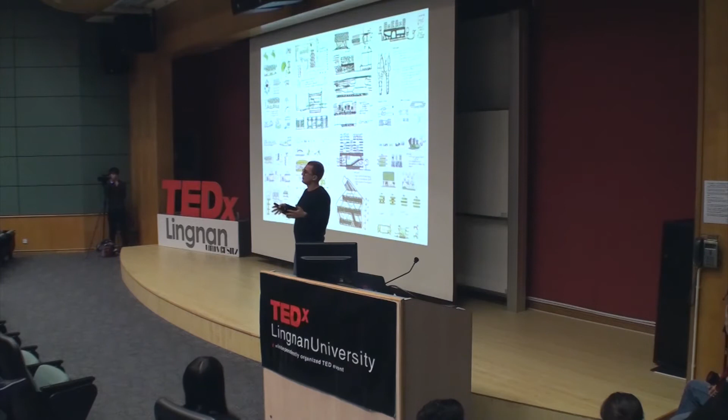What we've realized is that cities, and even new cities — master plans for entire new cities — are really 20th century master plans. The planners are imagining 20th century buildings, the buildings we see all around us today: the apartment tower, the retail podium with an office block on top, the factory building.

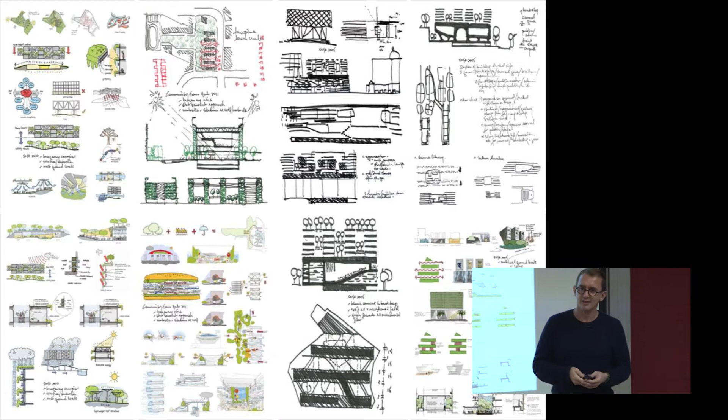If planners are working with these components, and these components were really perfected in the 20th century, no matter how interesting the city plan is going to be, it's being built out of out-of-date components.

So the first thing we thought is, if we're up against limits — limits of space, limits of resources — we can't keep spreading because we have this limited footprint on the Earth. We need buildings and city plans to be in a sort of both-and situation.

In modernism, in the 20th century, you say, oh, this is residential. We think in the future things might have to be many things at once.

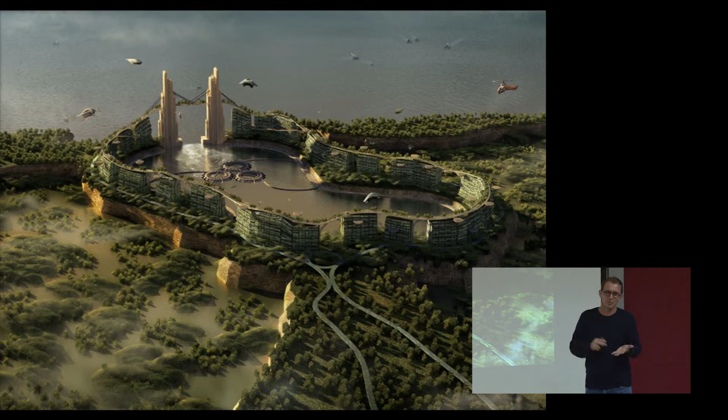This is a speculative scheme we did for Singapore, imagining global warming, where we had to protect against quite a high sea level rise. Singapore currently imports almost all its food and energy; this scheme imagines shrinking Singapore's food, water and energy footprint to the size of the island.

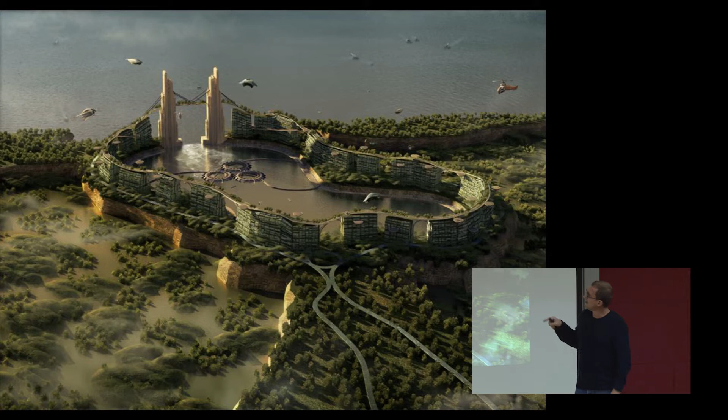So basically the whole coastline has been turned into a giant reservoir barrage wall to keep the rising sea levels out, and this development is a tidal power plant.

Singapore doesn't have very good access to sustainable forms of energy, but it does have quite high tides that go up and down. The idea is the water rushes in and out of this artificial inlet, with a turbine at the narrow mouth where the water goes in and out — but it's also an apartment complex, it's also a recreational area.

It would also incorporate all kinds of multi-use things. So it's power generation, it's flood protection, and it incorporates all the functions of a city.

The next idea is that we need high density to not grow beyond the city's limits and to allow growth within our limits. But we have to have high density, high amenity.

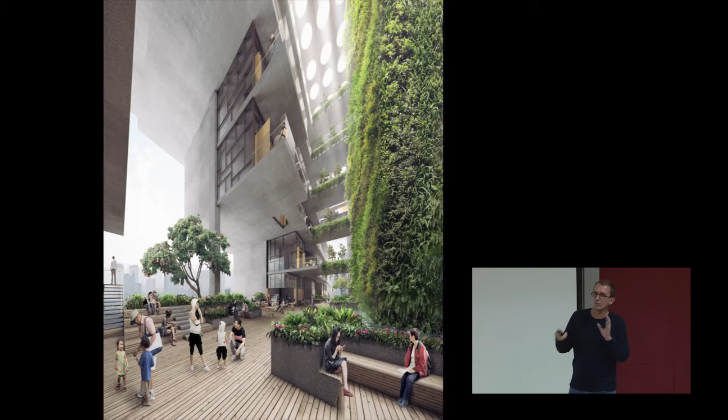So this is a scheme in China for a high-rise office block. The idea is that within the block itself, you have these kind of high amenity areas. You're not relying on the city outside to provide this amenity.

And this idea of density is that if we only keep building functional areas, we keep building offices and we keep building residences, but we don't build parks, we don't build recreation areas, inevitably our quality of life will decline.

But if, as we're going into this high density mode, we think about adding amenity at the same rate or even a greater rate than we have currently, you can actually anticipate a situation where our cities are both denser but have actually more amenities than they do now.

And so this idea too that we have to really actively move towards three-dimensional urban planning. Currently most planning is done two-dimensionally. There's some minor aspects where things have entered the third dimension, but we think in order to achieve this high density, high amenity situation, city plans are going to have to start setting all kinds of planning ideas that go quite high into the third dimension.

This is a scheme I'll show a little bit more later, where we propose a Singapore that's 9 times as dense as Singapore is now. But basically, to do a kind of city like this that was hyperdense, you would have to set street levels way up in the air that every new development had to connect into.

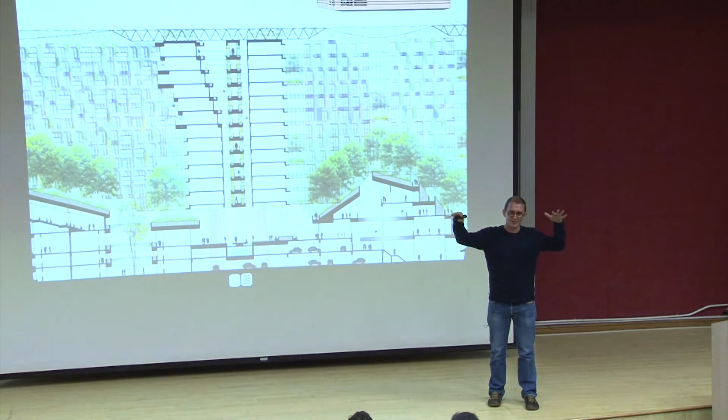This is a proposal we've made for a new city in Java. And so here we were thinking about actually a rainforest. If we're going to make maximum use of our energy, something that's really inspiring to look at is a rainforest where the trees have grown up to maximize the sunlight at the top, and then you have all kinds of subsequent uses as you come down that have less use for energy.

So here we have a solar canopy that covers the whole city. Beneath that you have a layer of agricultural for growing vegetables because they need diffuse light rather than direct light. We have apartments and other offices coming down.

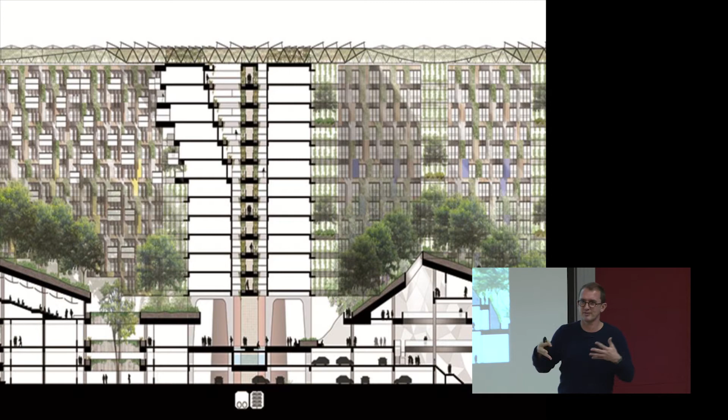Then you have a really interesting ground plane, which in this case we're actually running a tropical forest all the way through the city. So we're not displacing the forest, we're kind of interweaving in 3 dimensions a forest with the city. And that's the kind of environment within the city - it's a fantasy, but like tropical tapirs, endangered species, hornbills flying through the city and coexisting together with people.

So a primary idea behind this high density, high amenity is the need to have multiple ground levels. So this is a school we did in Singapore. It's actually got 3 major levels through the development.

And then on the roof we actually have a 400-meter running track and a playing field. So by consciously thinking of this idea of multiple ground levels, although it's such a high density school in the middle of the city, it actually has really large areas for the kids to play.

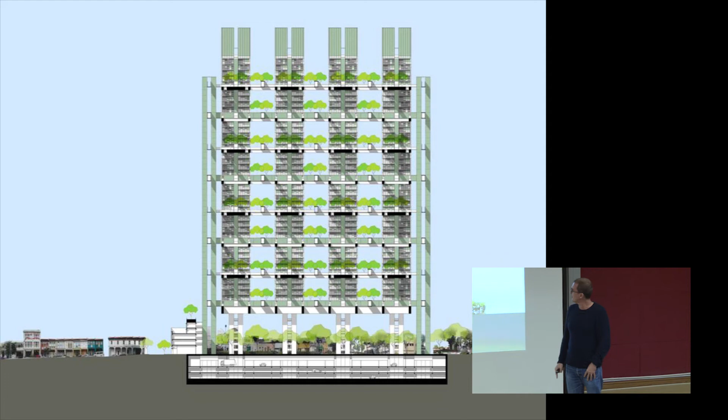Through this, we've been playing with ideas of sky gardens, sky streets, sky villages. So this was a project from 2000, a competition we didn't win, but it was a very high density development and has streets every 5 floors through the development leading to the apartments around.

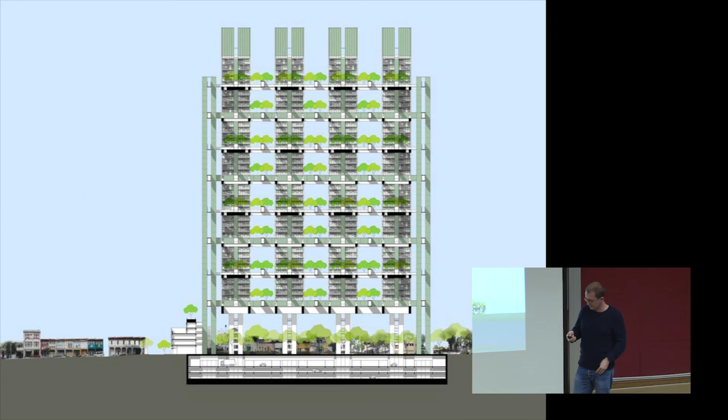This is a public housing project in Singapore. This was a large development, 960 apartments, and we felt that once you get into these large figures, you need to do something to deal with the scale.

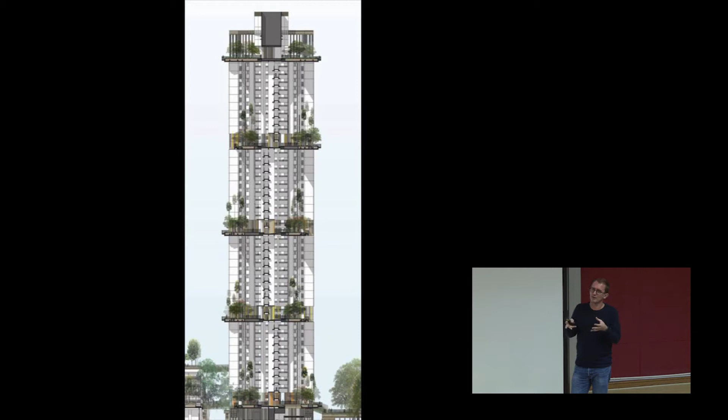So we developed 12 villages of 80 apartments each. Each apartment is identified with this village and shares a common space. Each village has a sort of village square and village garden.

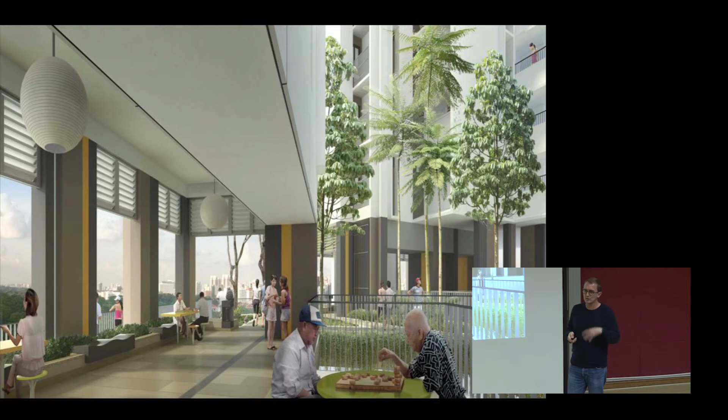All these dwellers can come and get to know each other, they can hold events there, they can walk their dog. And the idea is, as you come from your lift to your apartment, you pass through this space and you look down into it.

Hopefully the outcome is that as people pass through this space every day, it functions very much like a street in a village, and people will start to get to know their neighbours and say hello, rather than the typical high-rise situation where you just don't know any of your neighbours, even though you're all living very close together.

And then, rather than having penthouses on the top that are given to the wealthiest people because it's public housing, we thought it's really nice if there's a big public park on the top. So here, there's a 300-metre route through the top of the building, and everyone can enjoy the fantastic views.

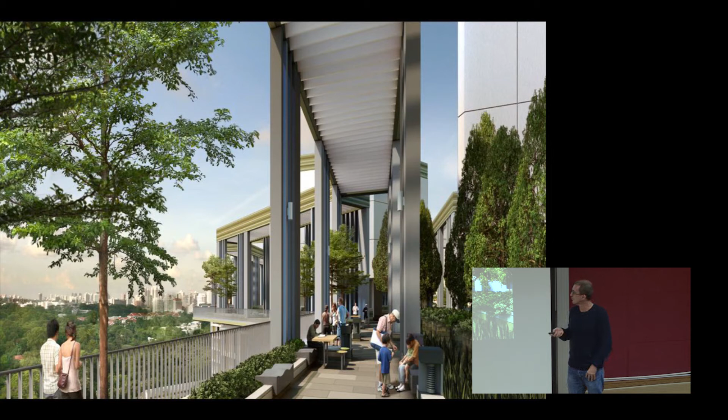Next one we thought is topographic architecture. So we realized as it gets more and more dense, people get a very hemmed-in feeling, because somehow high density buildings are very overwhelming and overpowering. But we realized people really love high density landscapes. Hong Kong is a great example — you've got mountains hanging over you everywhere, but they provoke a very different response than buildings do.

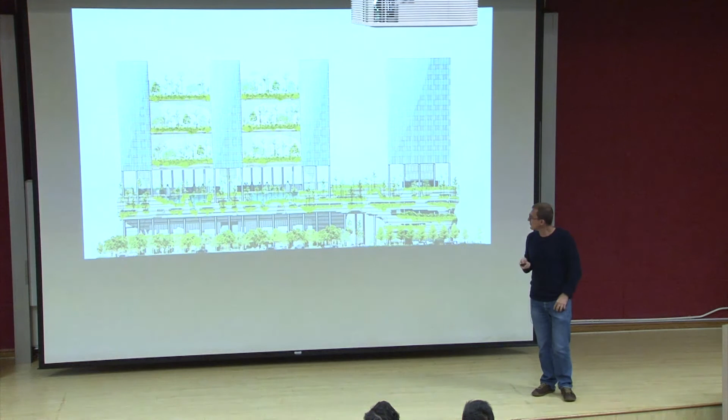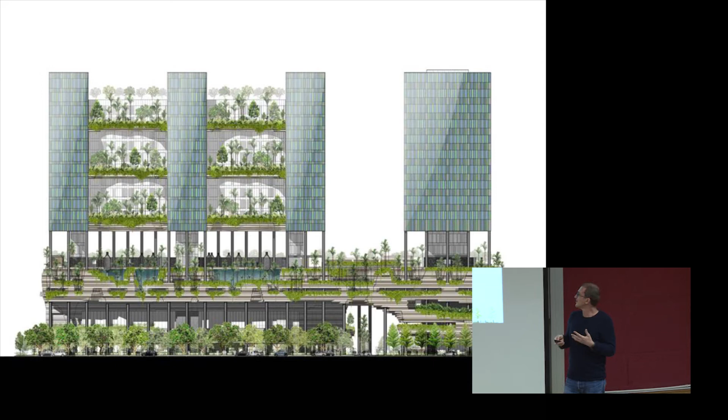So we thought, okay, if we're dealing with large lumps of buildings, maybe we can just turn them into landscapes. This is a hotel in Singapore that we finished a couple of years ago. Here we thought, rather than having a basement car park, which is an energy hog — you've got to light it 24 hours a day for the entire life of the building, and pump air through it 24 hours a day for the life of the building — much better to take the car park out. But car parks are ugly lumps of building. If we turn it into a kind of Chinese grotto of romantic gardens, maybe a car park's not such a bad thing in the city.

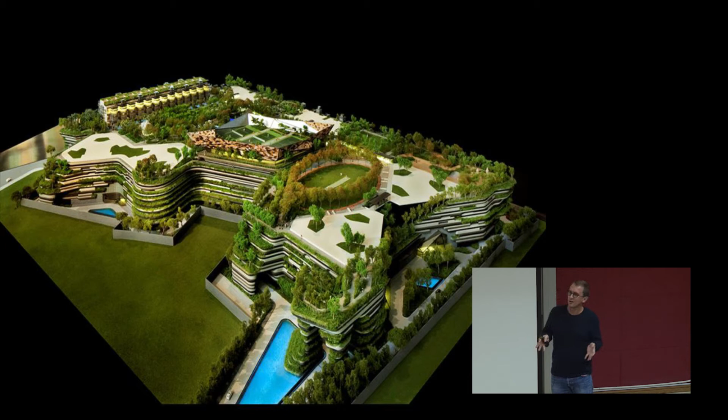Apartment tower in a complex in Mumbai, where we had an even more enormous car park holding about 15,000 cars. It would have been just a terrible neighbour — it's surrounded by developments of different size, but a lot of them look into this car park. So instead we've created a 5-hectare park out of the car park.

So we thought, well, how do you measure — if we're going into the super high density, how do we make sure it doesn't go the usual way of developers where they take everything profitable and remove everything non-profitable? We thought in the city of the future, it's good to have some indices where you can actually measure and score buildings against each other.

So generosity index is something we thought might be quite interesting. You characterize a building or a development as a person, and you think, what kind of person would the building be? Is it a friendly, open person who does things for you when you do things for them? Or is it actually kind of an asshole? I think many buildings, if you turn them into people, you would find out they're kind of psychopaths or assholes. They grab everything they can, they keep everybody away, they really behave quite badly.

So for instance, in our hotel project, we started thinking, how do we make it generous? For people, this is the public footpath past the hotel, but it becomes something where people can participate in the kind of experience of the hotel. They enjoy the water, the trees, the gardens, even though they're just walking past the building.

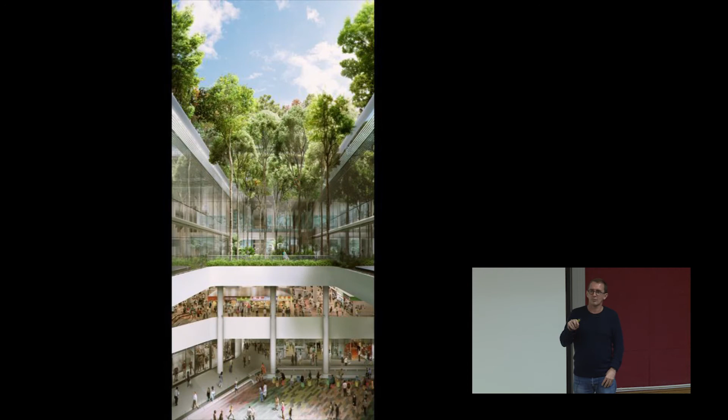So School of the Arts, although it's a school, we looked at the actual brief we got from the government and then how much we actually provided. We achieved a plot ratio for that of about 0.9, I think — so almost the entire site is repeated as community space additional to the brief.

This is the mixed-use development with the old people's home in it. This one you can see has community space through the whole building, achieving a very high community plot ratio. Next one we thought would be interesting is an ecosystem services score.

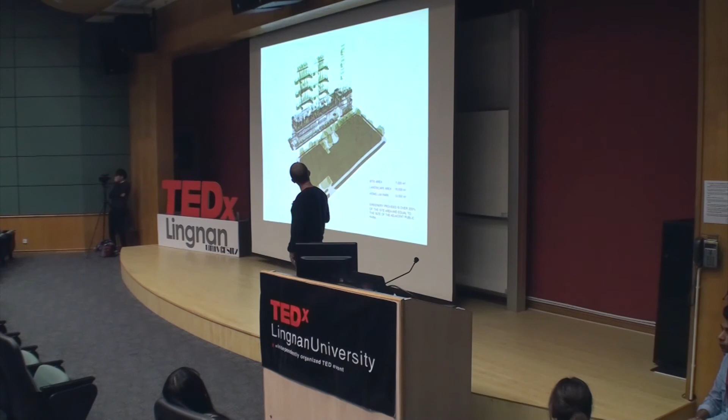So this kind of high-rise garden is really something interesting. And was a really nice illustration for us too is this building fronts a park. So although our site is half the size of the park, we actually have as much vegetation inside our building next to the park as there is in the park itself.

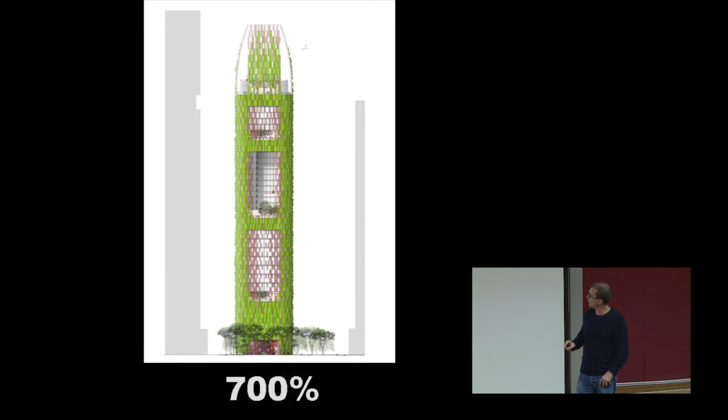And now we're doing a project in Singapore where we're achieving 700% green plot ratio. So now we have 7 times as much planting as if the site was left empty. This is a hotel, and it incorporates both a fully planted 60-story facade as well as 3 full levels of gardens as you go up.

The final vision is something where we thought, okay, let's speculate way into the future and let's push this idea as far as we can. So can we make high density, high amenity? Singapore is currently 5 million people on 700 square kilometers, so it's one of the densest nations on Earth.

So we thought, okay, let's give ourselves a challenge. We'll make a second Singapore and stick them all on these little islands off the coast of Singapore. So basically 9 times as dense as one of the densest cities in the world.

And so the idea is we don't even bother sort of reclaiming land, but have this matrix, 3-dimensional matrix that joins together some of the islands. And what we did, we used actually components of all our various buildings. But the idea here is that this 3-dimensional matrix is actually a sort of self-sufficient city.

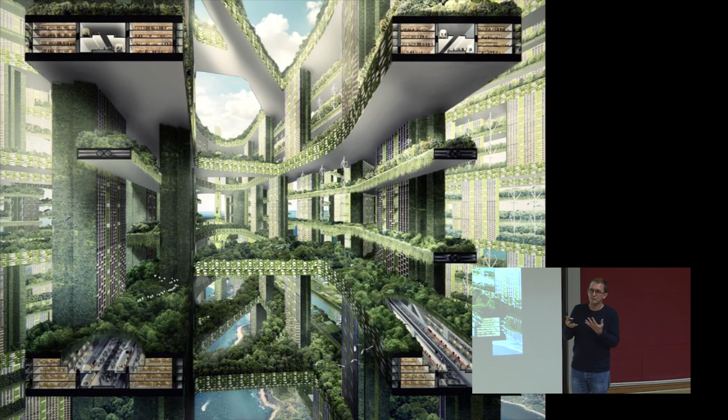It has transport running through it. It has retail shops. It has energy generation. It has farms. You can see in the background stadiums, wind turbines. And so this is actually basically 4 times as dense as Manhattan Island, 9 times as dense as Singapore.

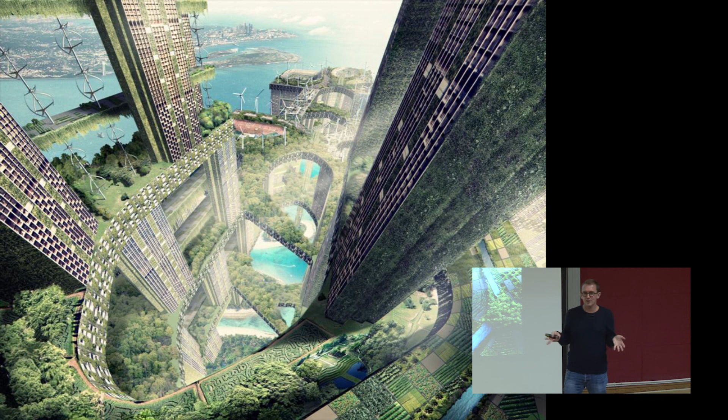And we think it is possible to envision a kind of high amenity life. And for us, that's quite interesting. And something that if we keep working with these 20th century components, we simply can't achieve a good lifestyle, I think, at the kind of densities we may have to deal with in future.

So for us, I mean, it's obviously not implementable at the moment, and there's all kinds of social and political and practical ways you would have to implement this. But if we keep going the way we're going, we're definitely just going to get to super congestion. And we think it's really interesting to start this conversation. What kind of super high densities should we be building in the future?